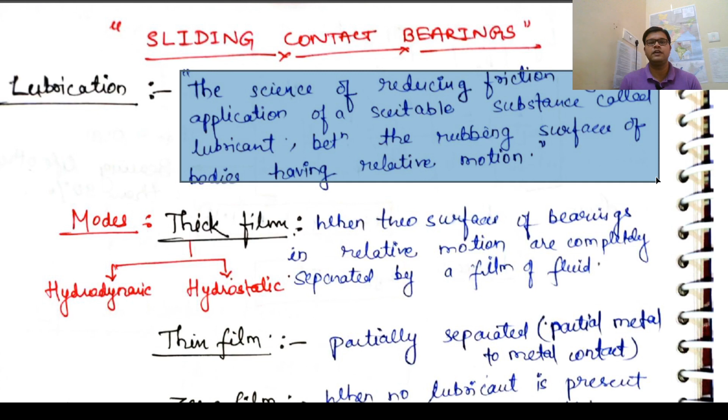Okay, for a rotating shaft or rotating member, if you are minimizing the friction, then an element has to be introduced that reduces the friction, and that particular element or fluid is called a lubricant. So the same case applies for sliding contact bearings. Why are we using lubricants in order to minimize friction? In order to reduce the friction component, we are using lubricant.

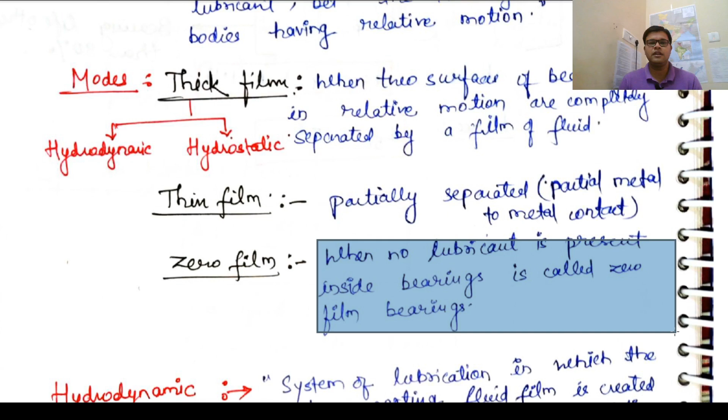And the third one is zero film. When no lubricant is present inside the bearing, it is called zero film lubrication. When there is no lubrication at all, the question arises - from where can we minimize the friction? We can clearly state that the surfaces used in case of zero film lubrication bearings, if the bearing has a very smooth surface with very less coefficient of friction, then you can say there is a sort of zero film lubrication concept there.

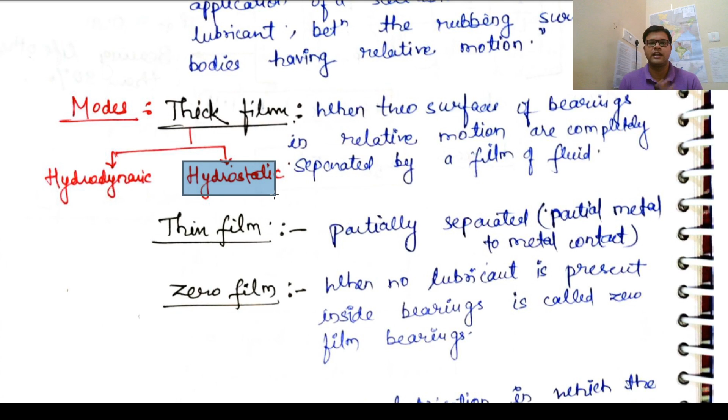The first is hydrodynamic lubrication. From the word itself it is clear - hydro means related to fluid, dynamic means related to motion. So when there is any sort of motion for the fluid, that particular concept is called hydrodynamics. You must have heard of thermodynamics - same case applies to hydrodynamics. Hydro here is basically your lubricant, dynamics means it flows. So what is hydrodynamic lubrication? The definition: the system of lubrication in which the load supporting fluid film is created by the shape and relative motion of the sliding surface. Now you need to understand this statement well - why we have given this statement and what is the concept behind hydrodynamic lubrication.

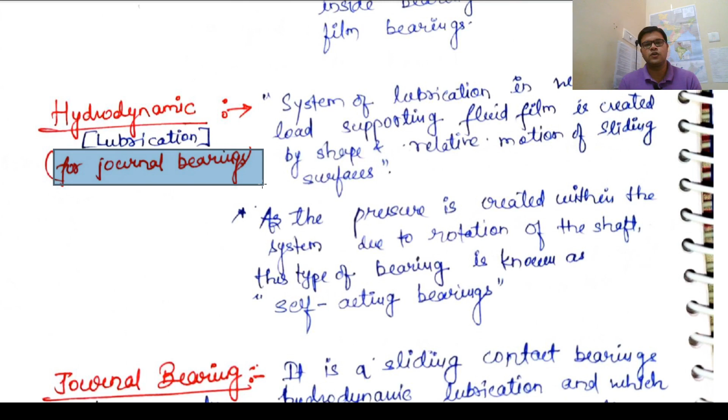What is self-acting bearing? Hydrodynamic lubrication, or bearings belonging to the hydrodynamic lubrication concept, are the self-acting bearings. The most important example you need to study under sliding contact bearings is highlighted here in red: journal bearing. So hydrodynamic bearings, your journal bearings, come under hydrodynamic bearings, also called hydrodynamic lubrication bearings, or also called self-acting bearings.

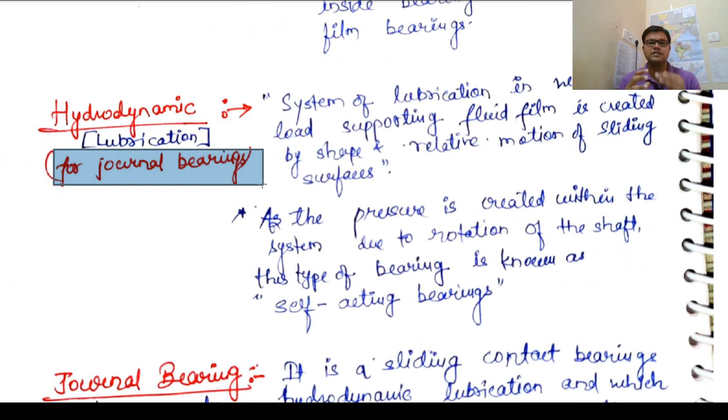Why did the concept of self-acting come here? Because you just understood the concept of pressure, you understand where the pressure is arising from, and pressure is being created here. So as the pressure is created inside this assembly or inside the system, no external agency is responsible for that. For that case, this is known as your self-acting bearings. Remember this.

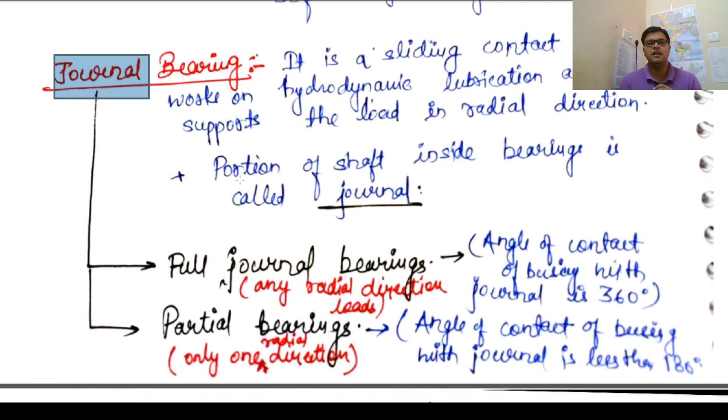Now in the assembly, suppose this is a shaft, this is a whole shaft, but only this portion of the shaft is inside the bearing. So the portion of shaft which is inside the bearing, this particular portion is called as your journal, and this assembly inside the bearing is called as your journal bearing. Clear? This is the simplest definition for a journal bearing.

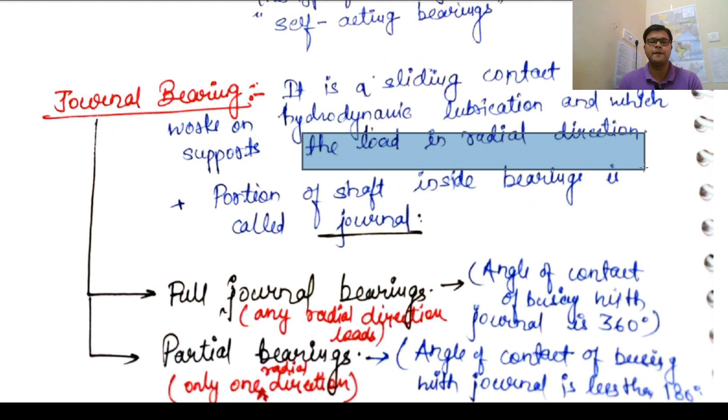So the journal bearing is further classified as, first is your full journal bearing, second is your partial journal bearing. So these two classifications are for your journal bearings.

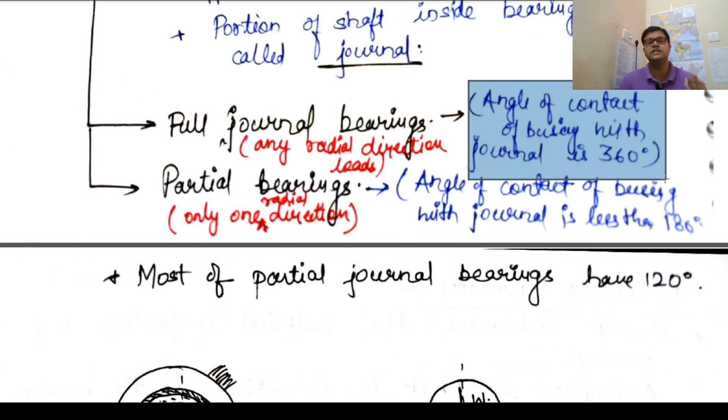So what is full journal bearing? The angle of contact of the bushing with the journal is 360 degrees. Let's look at the diagram below - this is your full journal bearing. How are we getting this full journal bearing? This whole shaft is circulated by the bearing in all the circumference of the shaft, the whole circumference of the shaft. So in that case you can say that it is your full journal bearing.

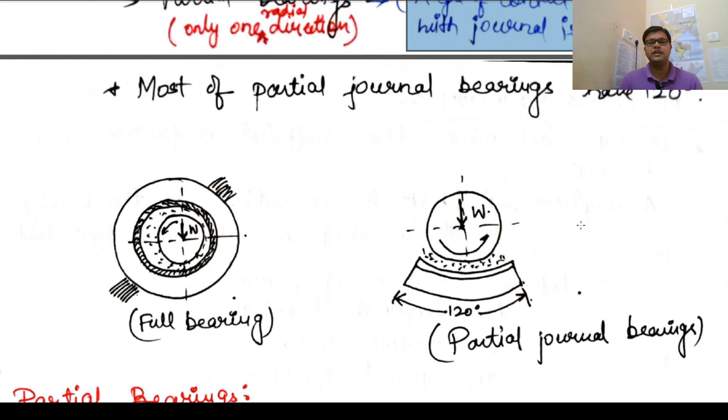Now what is your partial journal bearing? The angle of contact of bushing with the journal is less than 180 degrees. So when it is less than 180 degrees, you can say that it is a partial journal bearing. You can see here this is a shaft, but this bushing is only included up to this angle. From the center if you conclude the angle you may get, but it will be below 180 degrees, hence it is called a partial journal bearing.

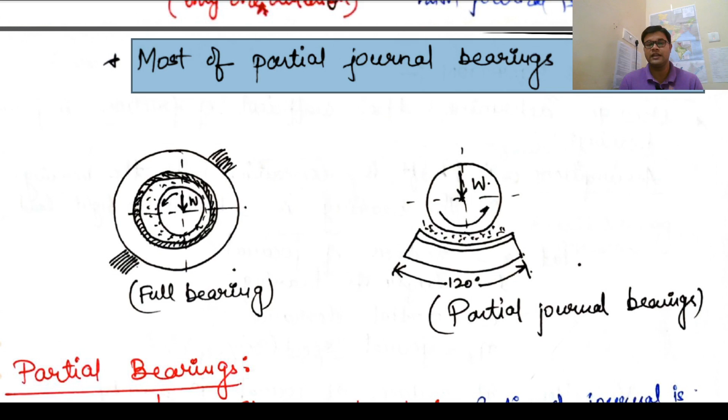Now this is one of the most important things regarding your partial journal bearing. You can say most of the partial journal bearings have 120 degrees. Preferable or suggested value is 120 degrees. This is not a mandatory case, it depends on the requirement. So this was your partial journal bearing.

Now full journal bearing is full journal bearing, but the partial journal bearings are further classified. First is your clearance bearing, second is your fitted bearing. Now what is clearance bearing and fitted bearing? By the terminology itself it is clear. Clearance means there must be some difference between the two surfaces.

So what are the two surfaces? The two sliding surfaces that we are talking about. And what is this clearance bearing? That is when the radius of the journal is less than the radius of the bearing.

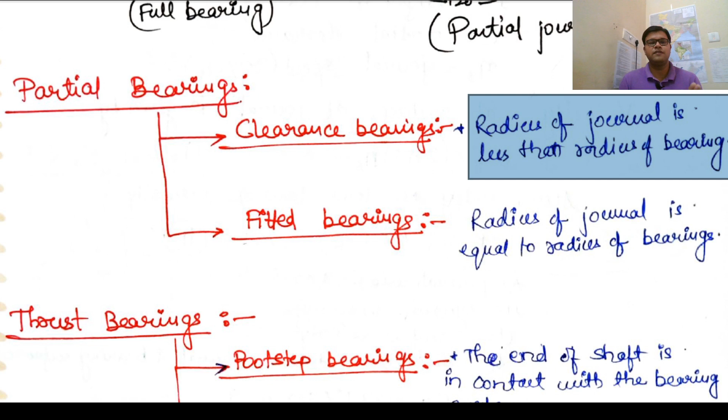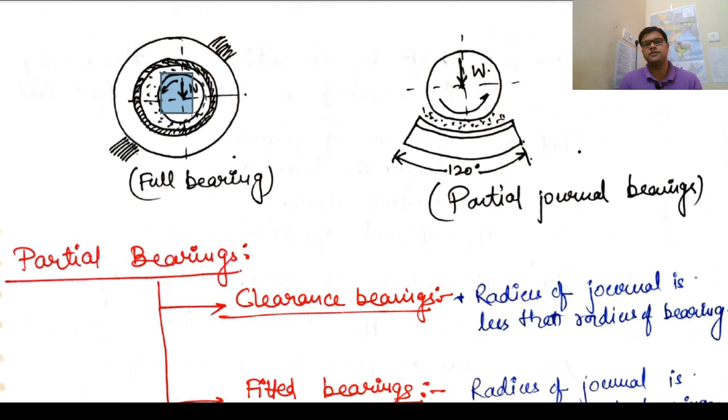Now you have seen from this picture, suppose this is the shaft - this is the center for the shaft, this is the center for the bearing. So when the radius of this shaft is lesser than the radius of the bearing, then it is called your clearance bearing.

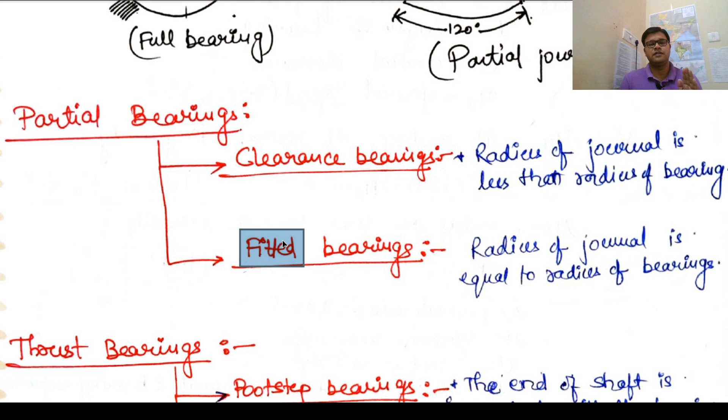But when the radius of the journal is equal to the radius of the bearing, it is called fitted bearing. From the term fitted itself, you can say there may be some fixing or totally fixed concept. So on that basis, when the radius of the bearing and the shaft are both the same, then it is fitted. When the radius of the shaft is less than that of the bearing, it is clearance bearing.

Now you can come to the thrust bearings. What are the thrust bearings? First is footstep bearing, second is your collar bearing. These are all being categorized under your hydrodynamic lubrication or hydrodynamic kind of bearings. Ahead we will also study about hydrostatic.

So in the footstep bearing, you can see when the end of the shaft is in contact with the bearing surface. Suppose this is the shaft, this is the end of the shaft. So when this end of the shaft is in contact with the bearing surface - suppose this is the bearing surface and the end is in contact with it - then it is called your footstep bearing. And the next is your collar bearing.

First of all, let me clear what is this collar. Collar is a sort of supporting member. What does this supporting member do? One end of this collar is fixed.

One end is in contact with the rotating material which has to be supported. The other end or surface of the collar is connected to the fixed portion or fixed surface. So one is moving, second is fixed, so this also acts as your supporting member.

That is the collar. So what is collar bearing? This collar integral with the shaft is in contact with the bearing surface. So in collar bearing, what do we see - collar integral with the shaft.

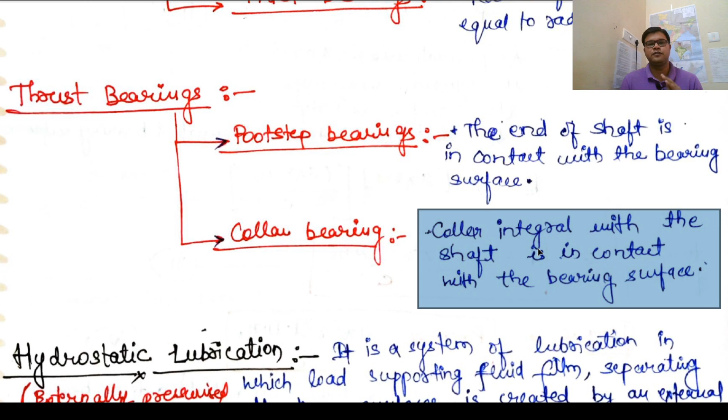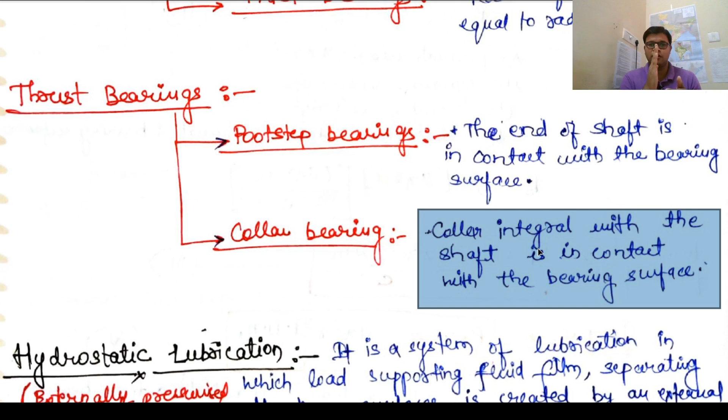Okay, shaft is one of your rotating members. One end of the collar is connected to the shaft. Suppose this is your shaft, this is your collar, so this end is connected to the shaft, but the other end of the collar, in case of bearing, when the collar is in contact with the bearing surface, then it is called a collar bearing.

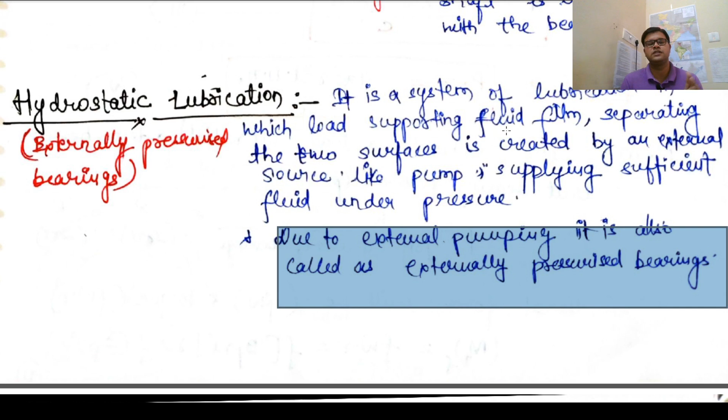Okay, moving on next friends, here I want to take a two minute break. Up to now, what we have studied from the start of this video till now is how we are going to classify bearings, and why we are classifying bearings. But now we need to study how we are going to select any kind of bearing, or what may be the criteria for selection of any bearing. So we have got some concept behind that, and we are starting with the same concept.

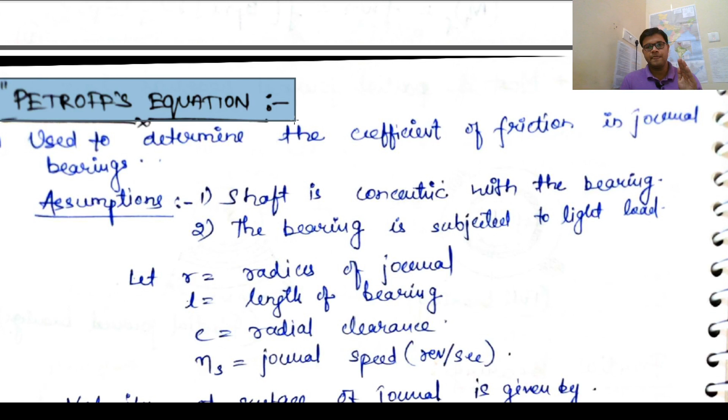The first one is Petroff's equation. What is Petroff's equation? It is used to determine the coefficient of friction in journal bearings. Now the question is, what is coefficient of friction? In engineering mechanics, in the topic of friction, you have read about coefficient of friction. If the coefficient of friction is more, there will be more frictional effect; if less, there may be less frictional effect. But you can't challenge the coefficient of friction, because it depends on the surface, or on the requirement, how much friction or frictional component is required in the sliding contacts.

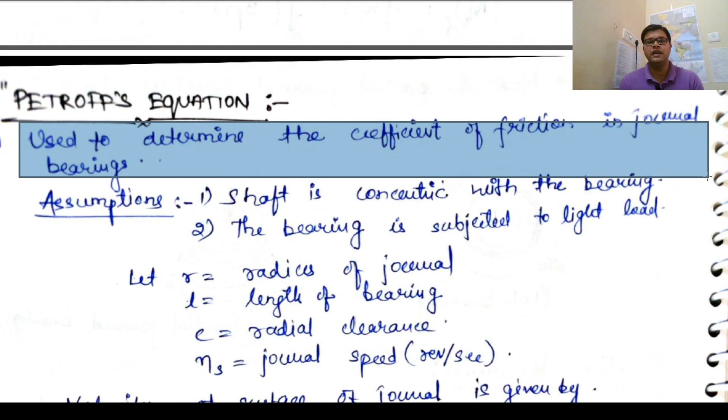So for deriving Petroff's equation, we have some assumptions. The first one is that the shaft is concentric with the bearing. Now a new term has arrived, concentric. What is concentric, or concentric circles? When any two circles or two elements have their center at the same single point, then that particular element or circle is called concentric. So we assume that the center of the shaft and the center of the bearing are at a single point.

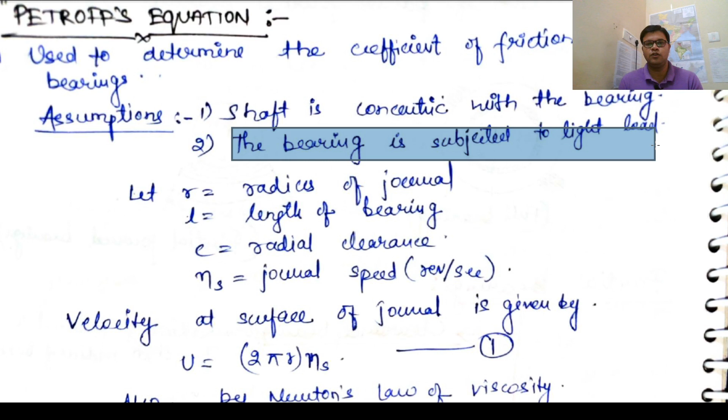Now next is the bearing is subjected to light load. So we can say in the Petroff equation, we have assumed the material will be loaded very lightly, or you can say light load, not very heavy load or moderate load.

Now let R be the radius of the journal, L is the length of the bearing, C is the radial clearance, and NS is the journal speed. So what we are getting: radius, length of the bearing, C which is the radial clearance, and NS is the journal speed.

Just let me interrupt in the middle, friends. Journal speed, what you are reading in this equation, we have derived in respect of revolution per second. In the question or in the problems, you might get revolution per minute or revolution per hour. So you have to manipulate or change the formula according to the revolution per minute or revolution per hour concept.

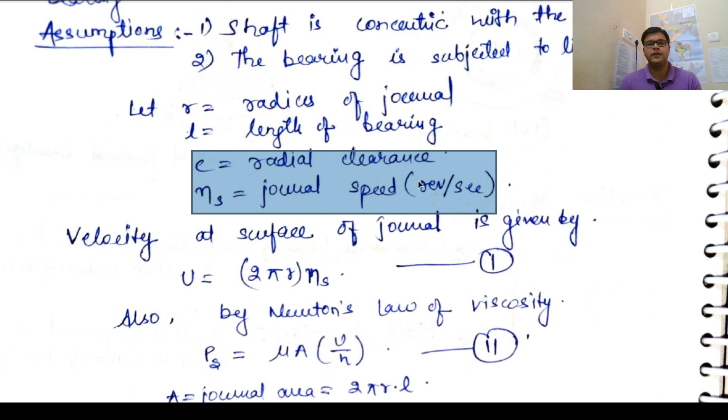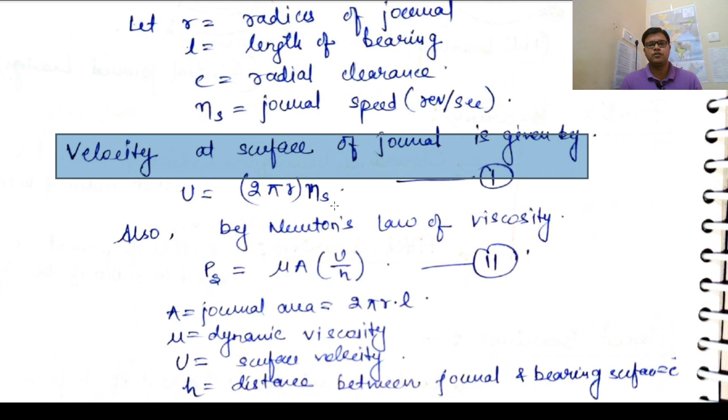Now we can say that the velocity of the surface of journal will be given by the circumferential area multiplied by how fast it is rotating. That basically is the speed. So speed is given by circumference multiplied by the rotation. Rotation is your NS, and 2 pi R is your circumference.

Now by Newton's law of viscosity. Now a new term comes for those who haven't read about it in fluid mechanics: what is Newton's law of viscosity? When you start reading the fluid mechanics topic, the first chapter or concept you study is viscosity, and then comes Newton's law of viscosity.

Newton has given a law for viscosity, clearly stating that the shear stress is proportional to the velocity gradient of the fluid. Now what is shear stress, what is velocity gradient, that you might read in fluid mechanics, but here we can clearly come to the point.

The shear stress tau is given by mu, this is the coefficient of dynamic viscosity that we need to calculate. And the second is u by h, this is the velocity gradient. Velocity gradient, as you've read in fluid mechanics, may be given by du by dy. What is dy? This is the distance, or the distance between the two plates.

And what is this du? This is the change in velocity. So when this velocity is taken with respect to the thickness, it is given as your velocity gradient. So this shear stress is proportional to your velocity gradient. In this case, this shear force will be equal to mu multiplied by A multiplied by u by h.

So shear stress is given by shear force upon area. So shear force will be equal to this shear stress, we can write as PS by A, can be multiplied here, so we will get this equation. So from equation 1 and 2, you have got the velocity of the surface of the journal, and second is the shear force.

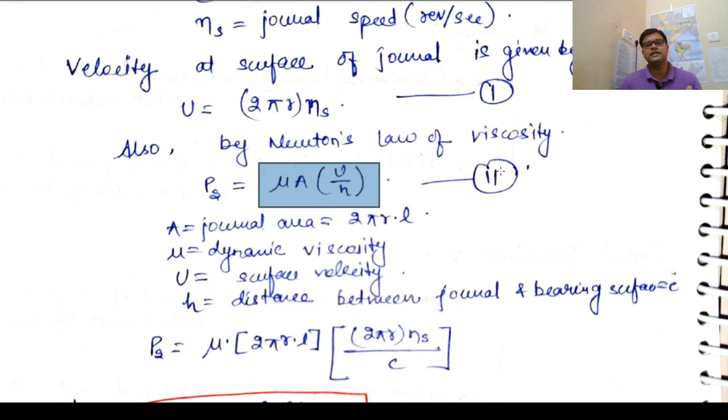Now moving on, the journal area is 2 pi RL. Why is this 2 pi RL? Because the journal area is the total portion of the shaft that is inside the bearing, and L is the length of the bearing, and this is the circumference. The overall area inside this particular bearing surface is the circumference multiplied by the length. So what you get is 2 pi RL is the journal area.

Next, mu is the dynamic viscosity. One thing let me clarify: in case of viscosity, we read about basically two types - the first is dynamic viscosity, second is kinematic viscosity. So our main concern in this topic of sliding contact bearing is dynamic viscosity.

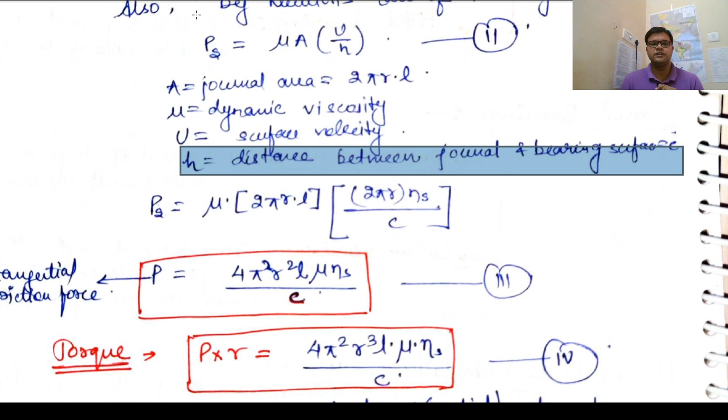U is the surface velocity that we already calculated. H is the distance between the journal and the bearing surface, and let it be equal to C, the clearance. So the shear force PS will be equal to the dynamic viscosity mu, A which we calculated as 2 pi RL, U given by 2 pi R NS, and H equal to the clearance between the sliding surfaces.

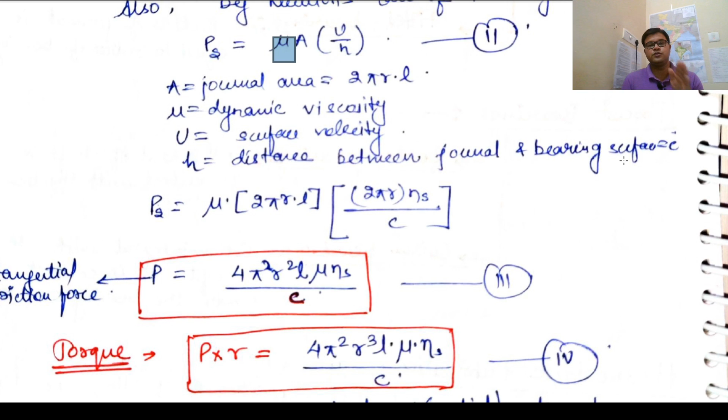So on the basis of that, what we have got is that the tangential friction force is given by 4 pi square R square L mu NS by C.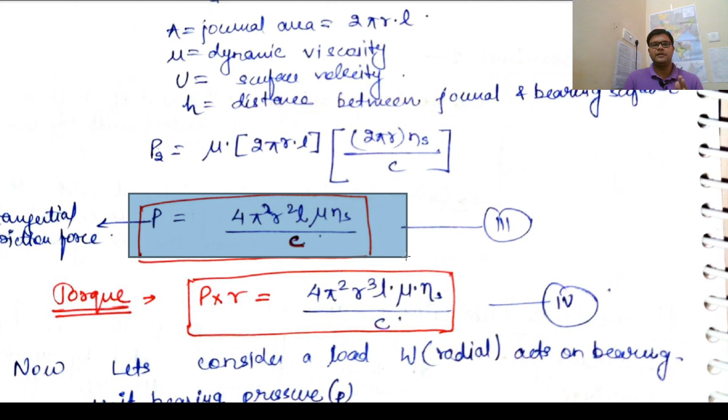Let's say this is your equation number 3. Now when you have calculated the tangential force, and when this tangential force is multiplied by the radial distance or radius, then you will get the torque. So the torque in the shaft or journal is calculated by this shear stress or tangential shear force multiplied by the radius. This gives simply equation 3 multiplied by R.

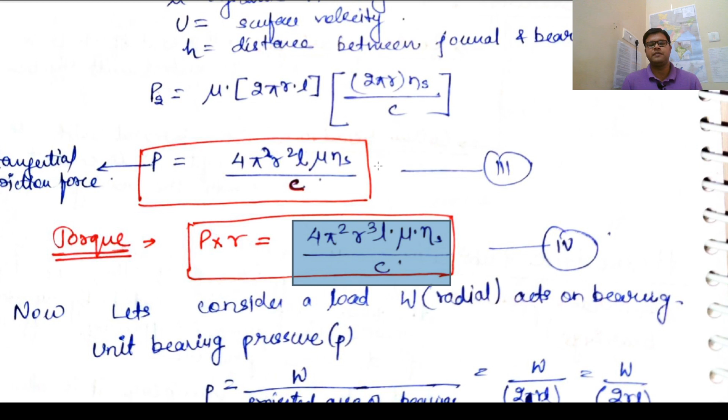Now let us consider a load acting on a bearing with unit bearing pressure P. We have calculated the force, we have calculated the torque, and now we are moving on to calculate the basic relation between the friction force and the coefficient of friction. Let this pressure P equals W upon projected area of the bearing.

What was W here? W is the radial load acting on a unit bearing pressure P. So pressure P will be equal to W upon the projected area of the bearing. You all need to remember this thing.

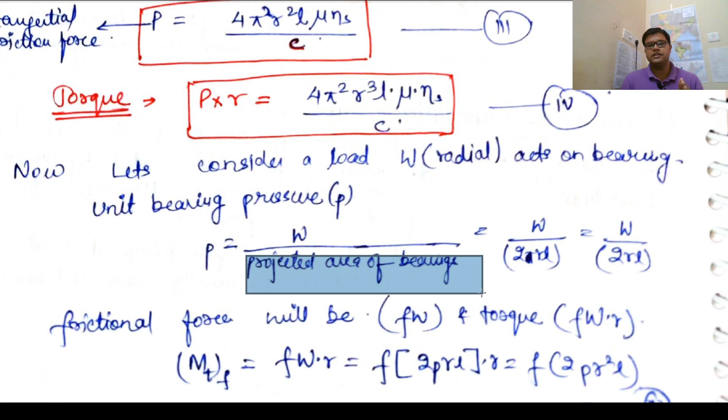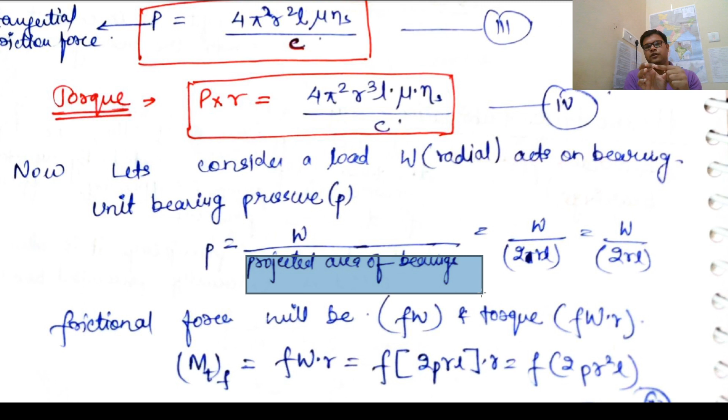What is the projected area of the bearing? Projected area of the bearing is nothing but the diameter and the length. This will be the projected area. Now projected area will be given by 2RL, or you can say DL. Now this P will be equal to W upon 2RL.

Now the friction force will be F into W. Why F into W? What is this F and what is this W? When calculating the friction force, the friction component is given by, let us say, F. So the friction force will be equal to the coefficient of friction multiplied by the load acting. Here the load is W, frictional component is F.

So what we are getting is F multiplied by W, and the torque will be equal to the friction force multiplied by the radius. So this torque MTF, the turning moment depending upon the friction component, will be given by FWR, F multiplied by 2 P R L into R, or F 2 P R square L. Let us say this is our equation number 5.

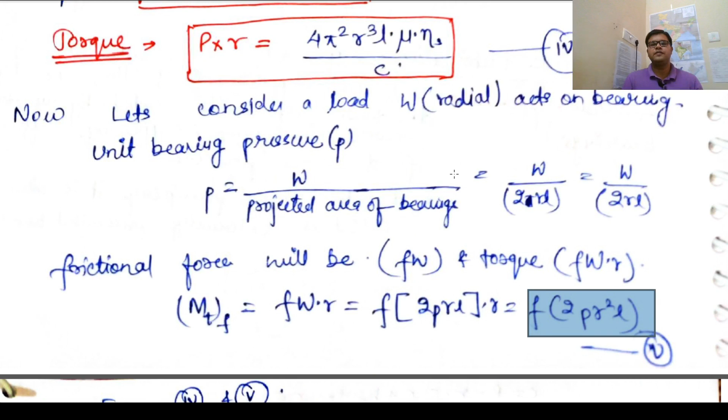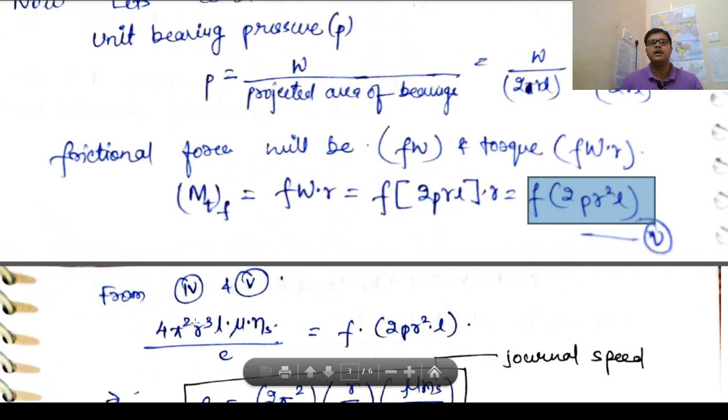Now from equation number 4 and equation number 5, both were the condition for the torque in the journal. So when both these are the torque, we can equate equation number 4 and equation number 5, and calculate 4 pi square R cube L mu NS by C equals F multiplied by 2 P R square L.

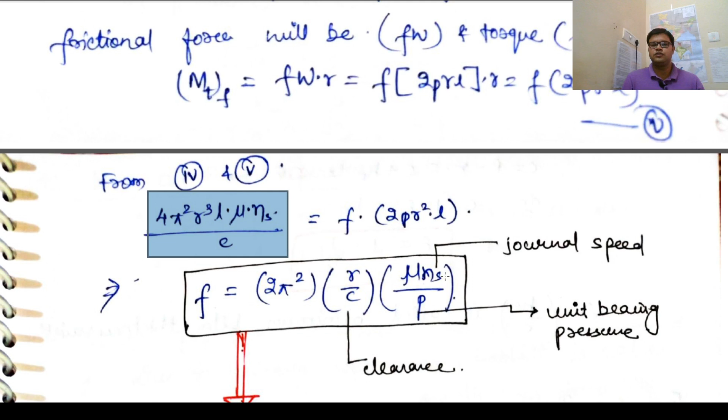On solving this equation, what you will get is this friction component F equals 2 pi square R by C mu NS by P. What is this mu NS by P? This mu NS by P is called your bearing number, which we will see in the next topic.

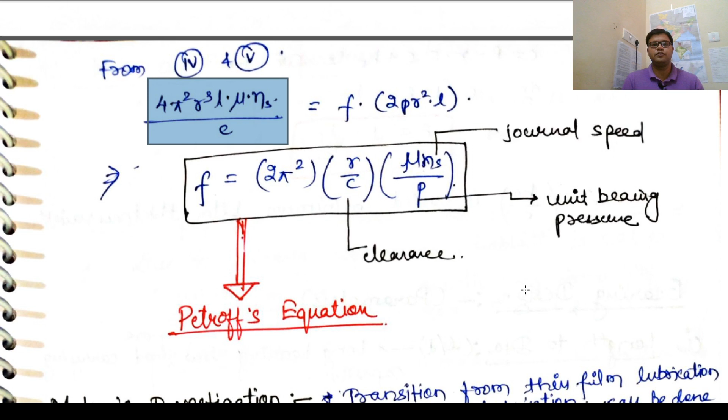So from this equation you will be getting R by C. C is the clearance, NS is the journal speed velocity, and P is the unit bearing pressure. So this equation for F is your Petroff's equation, and it is used for calculating the friction component in the journal bearing.

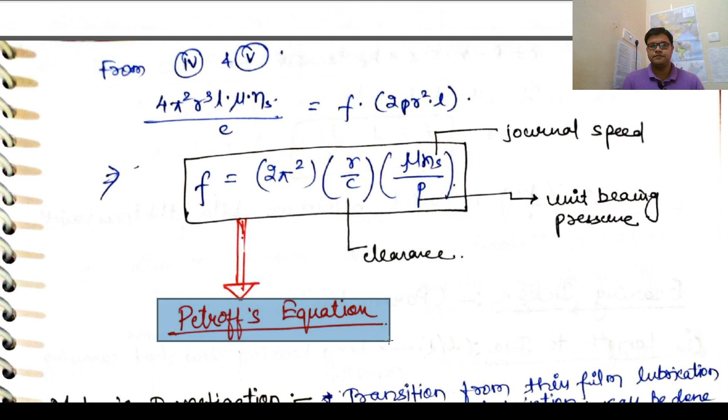Moving on, we have studied about thick film lubrication, thin film lubrication, and zero film. Thick and thin we have seen. Zero is not too important for your study point of view for this topic, but when there is a thick film lubrication and a thin film lubrication, the nature of the friction force and this bearing characteristic number, mu NS by P, was determined by McKee's investigation.

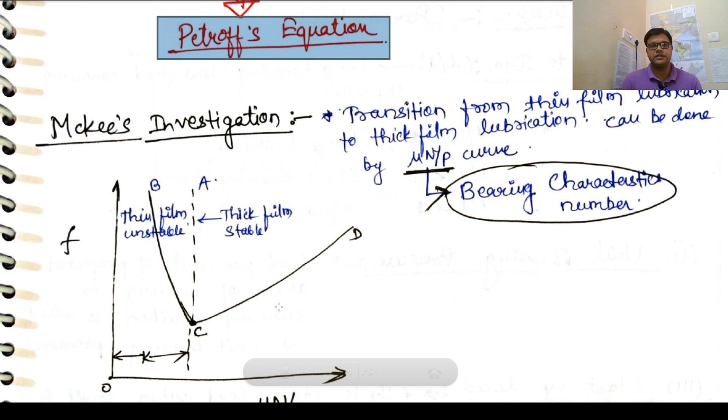The relation between the friction component and the bearing characteristic number, mu N by P, has got a relationship defined by McKee's investigation, that defined the transition from thin film lubrication to thick film lubrication, which can be shown by the mu N by P curve. What is this mu N by P curve?

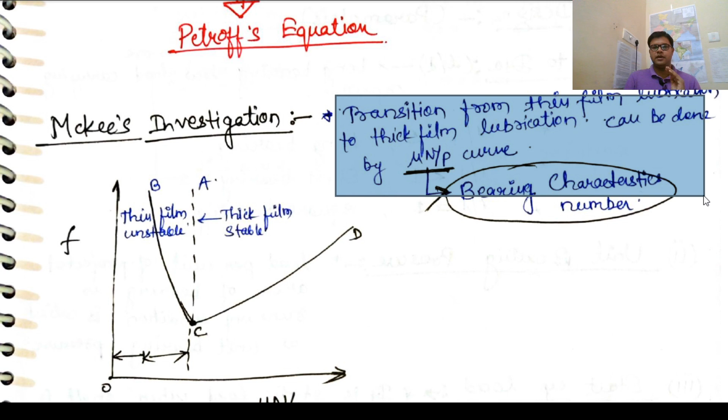This simply states that this is F, this is mu N by P. So on increasing the mu N by P from, let us say this is point B, this is point C, this is point D, and A is the curve that separates the thick film and thin film surfaces.

On the basis of that, for a particular value, up to this point, when you are increasing mu n by p, the F is decreasing. That means the friction component decreases on increasing the value of mu n by p. But at a particular point C, the curve will stop going downwards. Now on further increasing the value of mu n by p, the curve moves upward and reaches up to point D.

According to McKee's investigation, there is a transition from thin film lubrication to thick film lubrication. So the friction component mu n by p forms a curve in the shape of a U. From this curve you can conclude that this area is an unstable area because the curve is decreasing drastically, or you can say the friction component is decreasing drastically, and without friction you cannot work. That is the fundamental principle of natural friction.

So this is the unstable region, but from here mu n by p is increasing and reaches up to point D. So this is your stable region. McKee's investigation clearly states that thin film lubrication has the unstable zone and thick film lubrication has the stable zone.

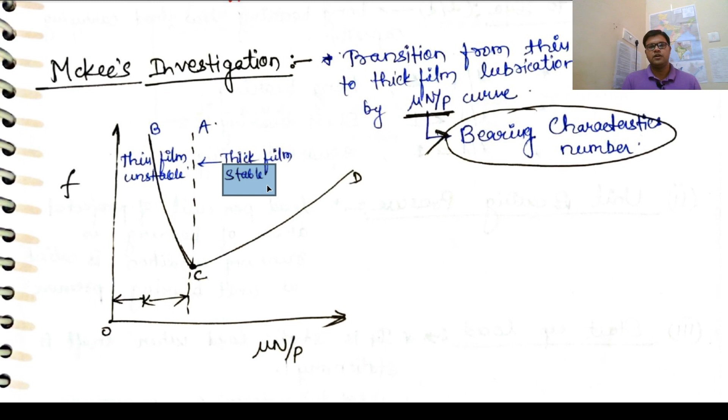Now next is the most important, the red highlighted topic of the sliding contact bearing, that is the Sommerfeld number. You just need to remember what the Sommerfeld number is, because it is very much important for your technical exam. Even for your graduation, if you are studying machine design, the Sommerfeld number is important because numerical problems come from this topic, clearly stating or asking you to derive the relation for the Sommerfeld number.

So Sommerfeld number, the name comes from the physicist who gave this number, Sommerfeld. He is an engineer who gave the concept that the Sommerfeld number S derives, or has the relationship between the clearance R by C, that is the radius and the clearance, with respect to the bearing characteristic number mu ns by p.

So on the basis of that, what Sommerfeld calculated is that this value S, first of all, as I have clearly written, is a dimensionless number. So the Sommerfeld number is a dimensionless number. Second, it has a relationship between the radius and the clearance along with the bearing characteristic number, that is mu ns by p, R by C whole square.

Now what you may face in the question is that for a Sommerfeld number, a condition may be given that R by C is constant. So if the viscosity is increasing and the other two elements are kept constant, what will be the change in the Sommerfeld number? Will it decrease, increase, remain constant, or be zero? Since mu is increasing, S has a direct relationship with mu. So when it is directly proportional, if mu increases, S increases, and vice versa for the other elements of this formula.

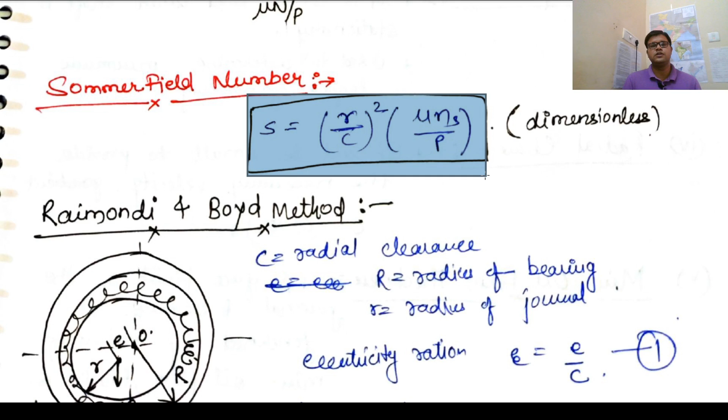So this Sommerfeld number is given by S equals R by C whole square, times mu n S by P. Now the next topic is your Raimondi and Boyd method.

What was this Raimondi and Boyd method? Why did it come into existence? Why did they give a separate concept for sliding contact bearings? Because at the end, they calculated the minimum film thickness variable. So their experiment was based on a concept.

In Petroff's equation, we assumed that the shaft and the bearing are in concentricity, meaning they maintain a concentric relationship. Now we can differentiate between the Raimondi and Boyd method and Petroff's equation based on this.

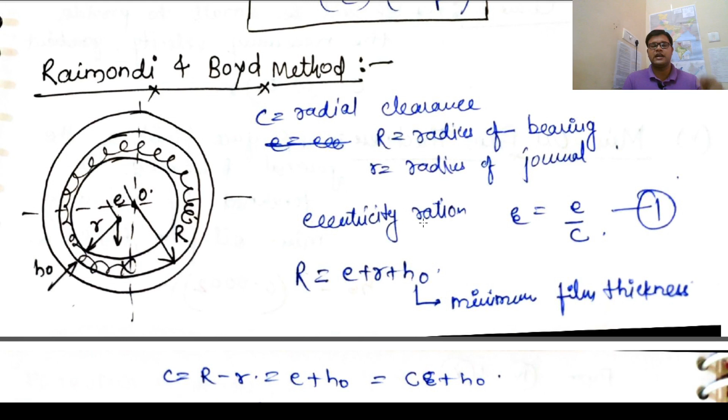In case of the Raimondi and Boyd experiment, what they found is that when the shaft is rotating inside a bearing, there is some eccentricity of the center of the shaft from the center of the bearing. In order to calculate for that, Raimondi and Boyd made a conclusion for the minimum film thickness ratio. So let us say this is the overall assembly.

This solid portion inside is your shaft, and this hashed portion is your bearing. Let us say C is the radial clearance, R is the radius of the bearing, and r is the radius of the journal. This E is nothing but the eccentricity of the center of the shaft from the center of the bearing.

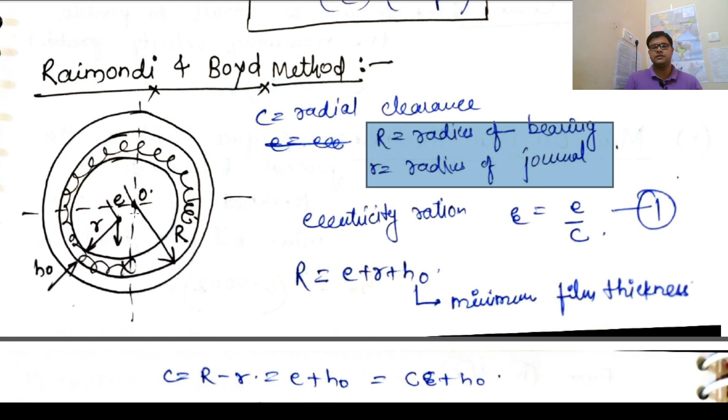According to this eccentricity ratio, what you can calculate is given by how eccentric it is and how much is the clearance. This is epsilon equals small e by C.

Now this capital R, the radius of the bearing, will be given by e plus r plus H0, where H0 is nothing but the film thickness.

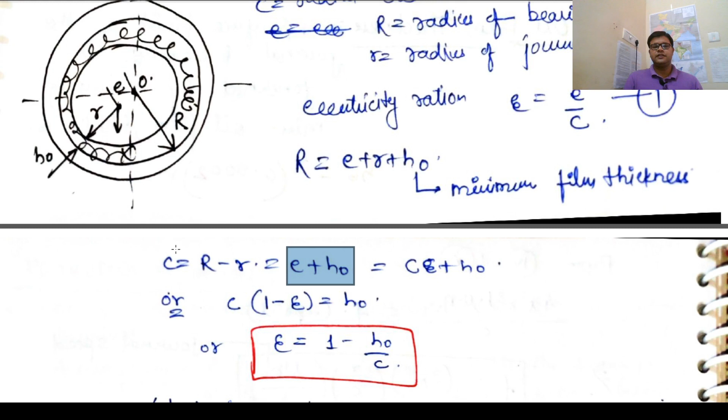Now this C equals R minus r, clearance equals outer radius minus inner radius, as we have already seen in case of clearance bearing. This equals e plus H0. Now on equating this whole equation, what we are getting is this clearance into 1 minus epsilon equals H0, or epsilon equals 1 minus H0 by C.

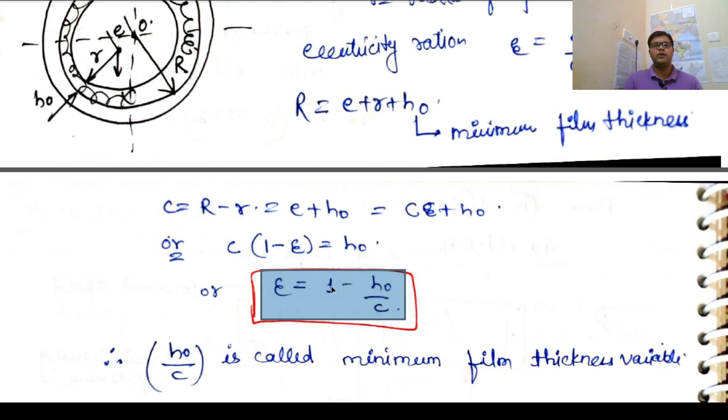So from this equation, what we can conclude, or what the Raimondi and Boyd method has given us, is that H0 by C is called the minimum film thickness variable. So why do we need to calculate this H0 by C ratio?

Because we have studied about thick film lubrication, and on the basis of this thick film lubrication, when you are going to design a bearing, this H0 by C has got its own table, where you need to calculate H0 by C, or find the value of H0 by C, and you can calculate the eccentricity of the bearing, how much eccentric you can keep your shaft from the bearing center.

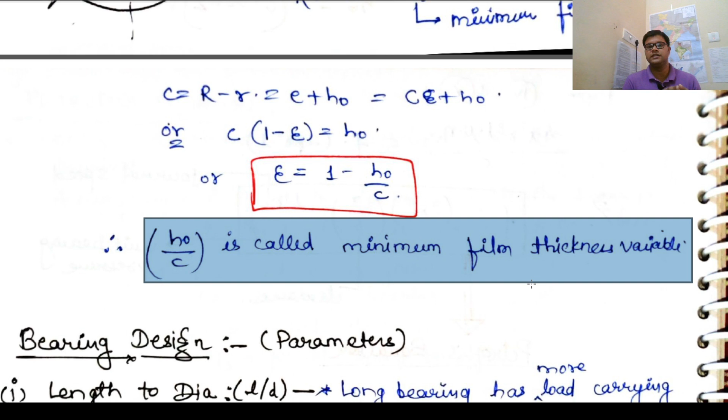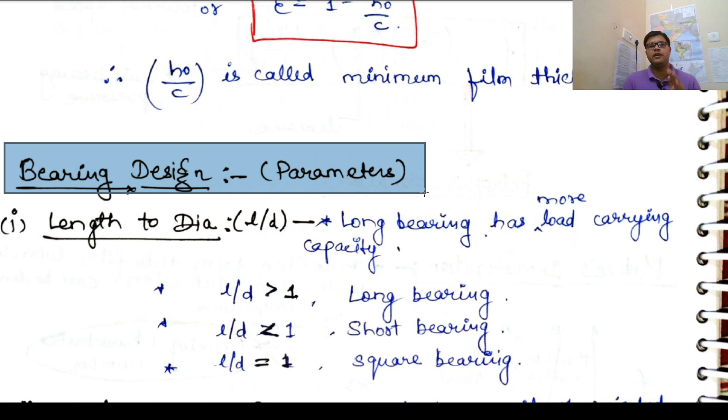So the next is your bearing design parameters. This is a short one-liner theoretical part that you need to keep in mind for your technical exam. So the first is the length to diameter ratio of the bearing.

Long bearing has more load carrying capacity. So when L by D is greater than 1, this is given by long bearing. L by D less than 1 is short bearing. L by D equal to 1 is known as square bearing. This is one of the key points you can say: long bearing has more load carrying capacity.

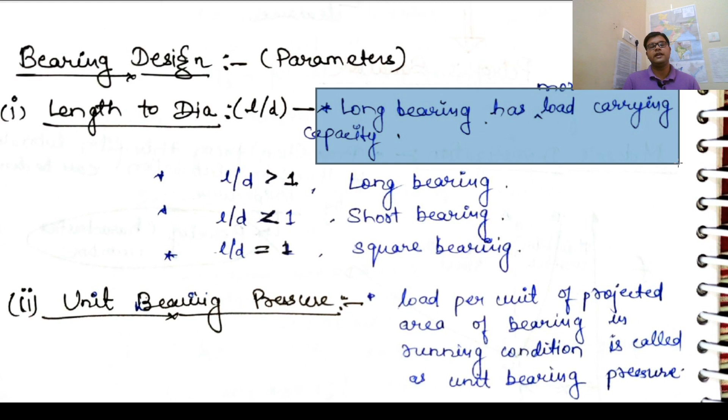Next is the unit bearing pressure. Already we have seen this P0 in Petroff's equation, which is the load per unit of projected area of bearing in running condition, called unit bearing pressure. First of all, this pressure depends upon the projected area, not on the cross-sectional area. This you need to keep in mind.

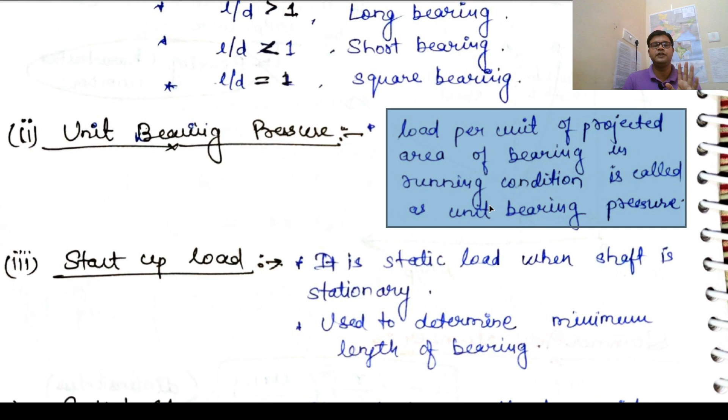The next is the startup load. It is static load when the shaft is stationary, used to determine the minimum length of the bearing. Why is there a need for startup load? When you are going to assemble the shaft and bearing assembly, what we are doing is providing some initial static load present in the shaft in order to provide the assembly. So it is a static load when the shaft is stationary, used to determine the minimum length of the bearing. Because on the basis of that you can get the length of the bearing.

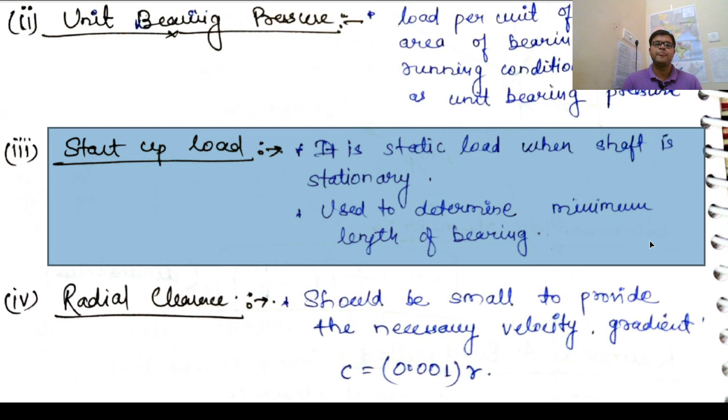Next is the radial clearance. Radial clearance should be small to provide the necessary velocity gradient. In case of Newton's law of viscosity formula, we have seen shear force equals mu A u by h, where h was the clearance. This clearance should be minimum, so you can take the standard value as c equals 0.001 times the radius.

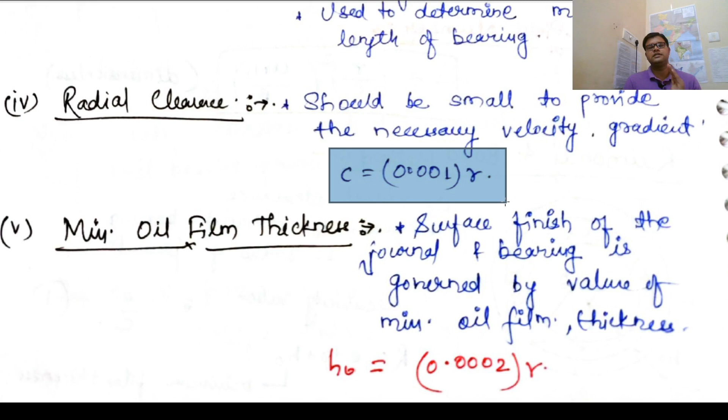Next is the minimum oil film thickness. Surface finish of the journal and bearing is governed by the value of minimum oil film thickness. This is one of the key points: surface finish of the journal and bearing is governed by the value of minimum oil film thickness, and this H0 equals 0.0002 times the radius.

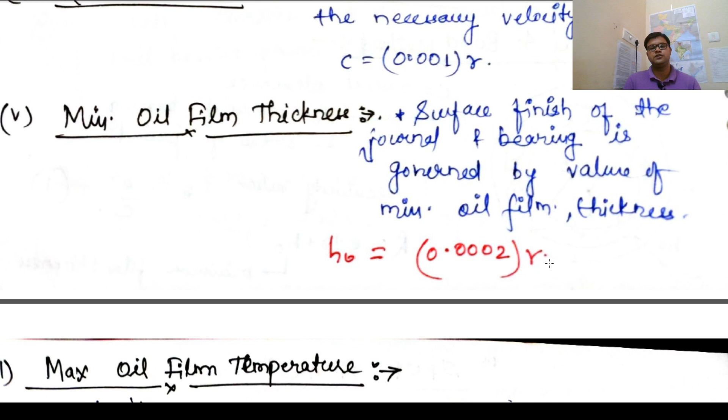The next is maximum oil film temperature. In the previous concept we have read about the thickness, but there was no query regarding the temperature.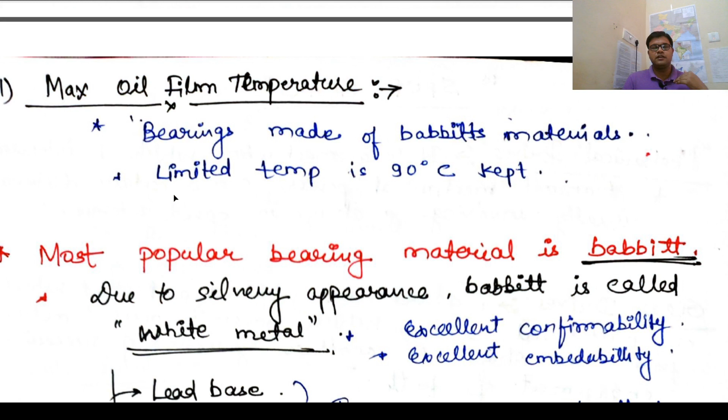So here comes what may be the maximum oil film temperature. The limited temperature is 90 degrees Celsius, which is kept for the bearing. Now if the value increases, we can provide some coolant, or some lubricant that has its own self heat dissipating capacity. On the basis of that, in order to bear the temperature, you have the bearing materials. This bearing is made of a Babbitt material.

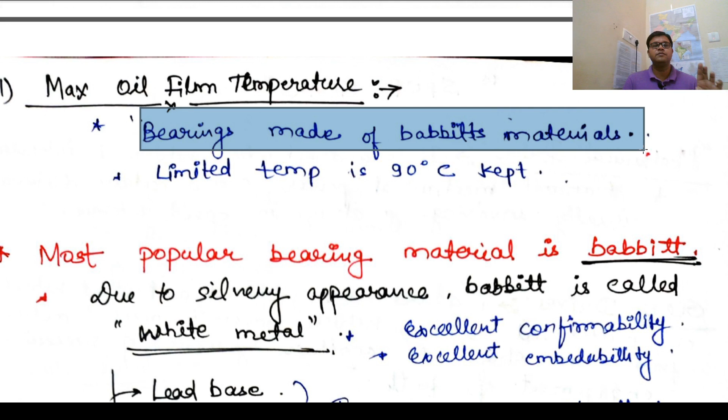What are Babbitt materials? This is one of the most important theoretical questions about bearings, asked many times in your technical exam when you have got the topic of bearing. So let us see, the most popular bearing material is your Babbitt. What is this Babbitt material? It is a sort of alloy. It has a silvery appearance, and the Babbitt is called white metal.

First of all, why are we using this Babbitt material? The first important property is excellent conformability, and the second important property is its excellent embeddability. This embedding is nothing but it can be easily embedded into any other material.

If your external or internal radius, other than your bearing material, the stationary part or the rotating part, are made of some metal, then in order to fix the material from the stationary material, it should be easily embedded into the fixed part, or the fixed structure, so that the assembly could be much more durable and efficient. So it has got excellent embeddability.

Second is excellent conformability. Conformability is nothing but providing a durable life, or an efficient life, for the bearings or for the assembly.

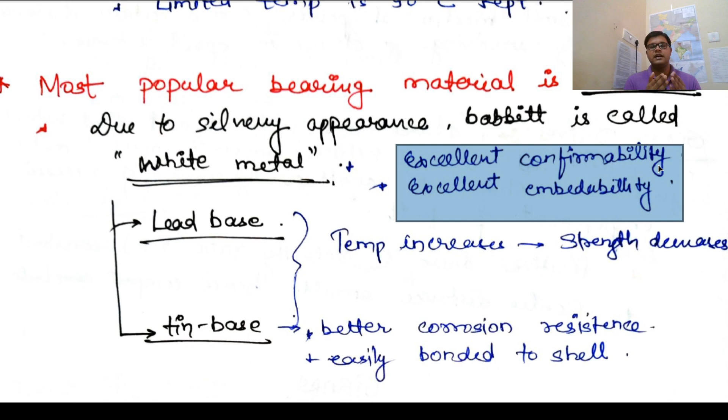Now this Babbitt material is made of basically two different bases. It is a sort of alloy with some base. The first case is your lead based alloy, second is your tin based alloy. So for Babbitt with a lead base, as temperature increases, strength decreases. So for the lead based alloy, you can conclude that if the temperature will increase, the strength of the bearing will decrease.

Now the key point for the tin based alloy, why they are more preferable, is just because they have got better corrosion resistance, and second, they are easily bonded to shells. So the tin based Babbitt materials are more preferable over lead based Babbitt material.

So friends, this was basically the concepts of your sliding contact bearing. From the start, let me revise you in just a single minute. We have read about why sliding contact came into action, what was the kind of lubrication, what was thick film, thin film, and zero film lubrication.

Then comes your hydrodynamic lubrication, then comes your hydrostatic lubrication. This was the broader classification about your sliding contact bearing. Now, how were we going to read, or what was the basis of reading this? So we have got the Petrov's equation. After that we have read about the Sommerfeld number, and then we have read about the Raimondi and Boyd method, and then we have got the McKee's investigation. On the basis of all these four issues, we can go for the selection of the bearing.